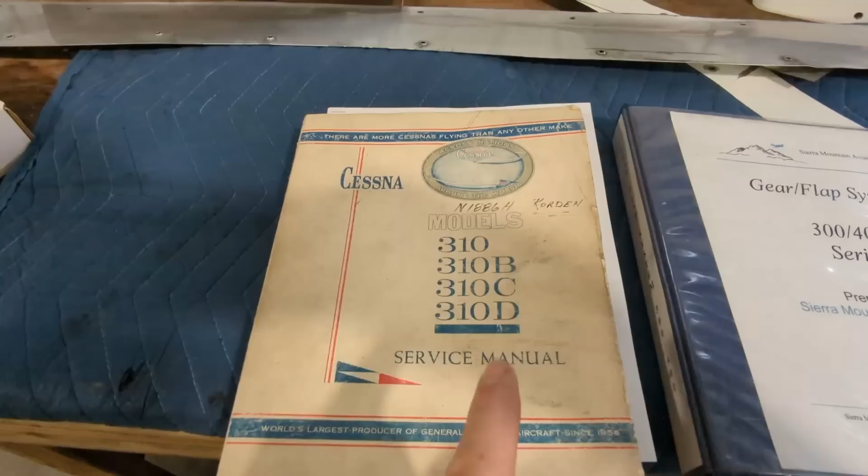Two things can kill a 310. One is beating them to death as a multi-engine trainer, and two, lack of maintenance of the landing gear. And before you know it, it's usually something like the nose gear fails, one of the landing gear fails, gear up landing, and the aircraft is basically totaled because it costs more to repair than it's worth. Stay tuned.

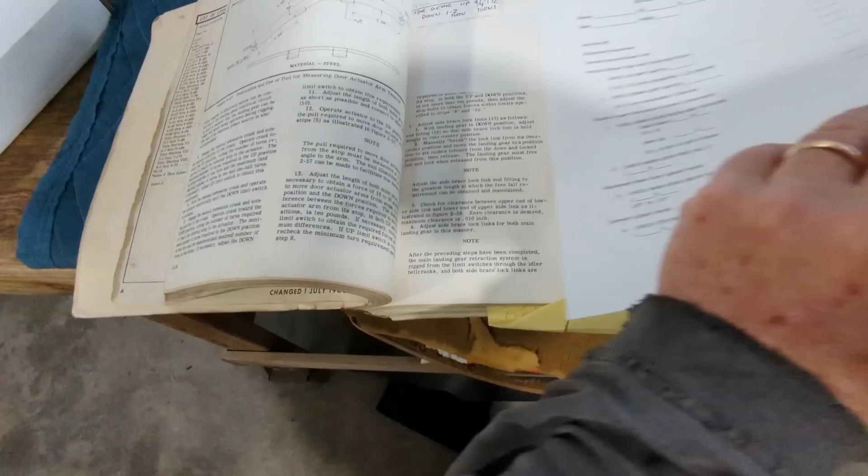Here's our source material for the gear rigging check. The service manual for the 310C and a gear flap system 300/400 series manual prepared by Sierra Mountain Aviation, Dan Grass, the AI, who's overseeing all our work. If you turn to section 2, 315, we've got rigging of the main landing gear. Step-by-step detail. I just love these old manuals. They really explain well how to properly maintain these aircraft. And then we'll also be using this checklist that Dan's developed over the years to check all the important specifications of the rigging of the gear. Then we're going to lube all the points of contact.

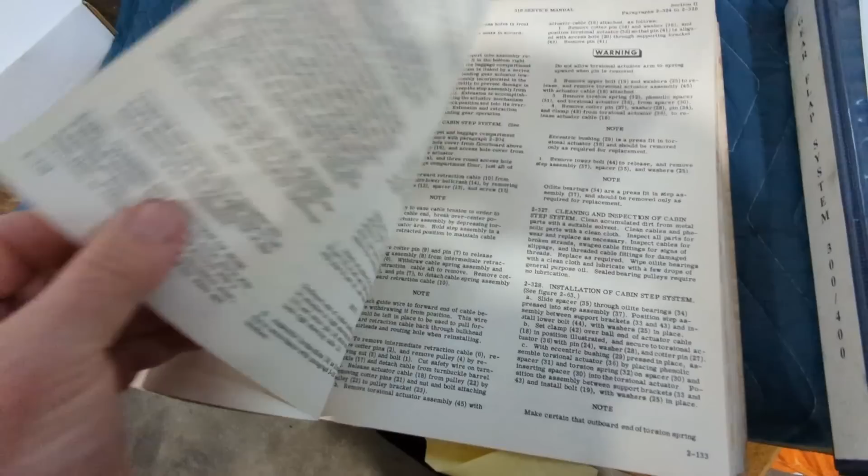Jordan's trying to explain this to me, but it's easier if she just tells us. What's the grease we want to use on the landing gear for the 310? So usually people use Aeroshell 5, but we like to use the Mobil SHC 100. You could get it on Spruce. It's a red grease. It's great. That's for the wheel bearings. Yes. Now what about for the landing gear on the Cessna 310? So the landing gear, you want to follow the maintenance manual for the aircraft, and for the 310, it's going to be the Aeroshell number 5. Okay, so I look for the grease gun with the big number 5 on it? Yep. Okay, let's go find it. There it is, Aeroshell number 5.

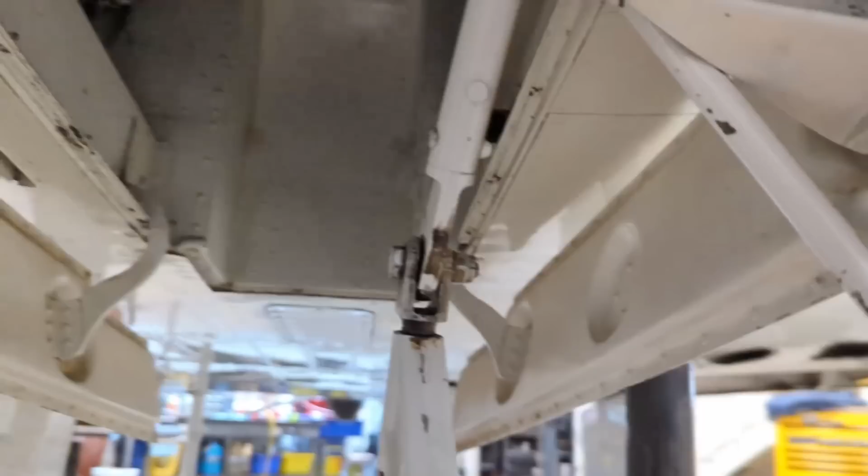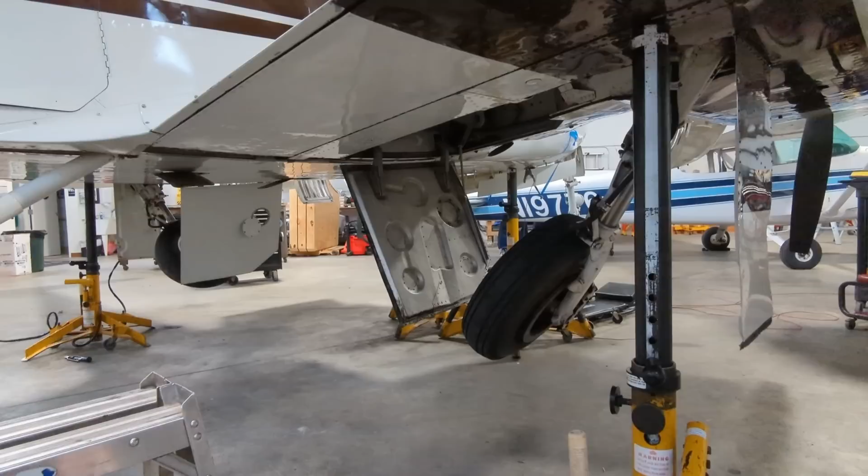So now we want to take the nose gear out of the whole system by disconnecting it right here. And so now the nose gear can just swing freely here because we got to check the main gear, right? That's what the next objective is, to get all the specs on the main gear. Correct. And take the nose gear out of the equation. Yes. Okay, stop. Okay, perfect. Turn the power off. Now we can get access to these inboard gear doors. So we want all these gear doors disconnected for this test, including the inboard ones.

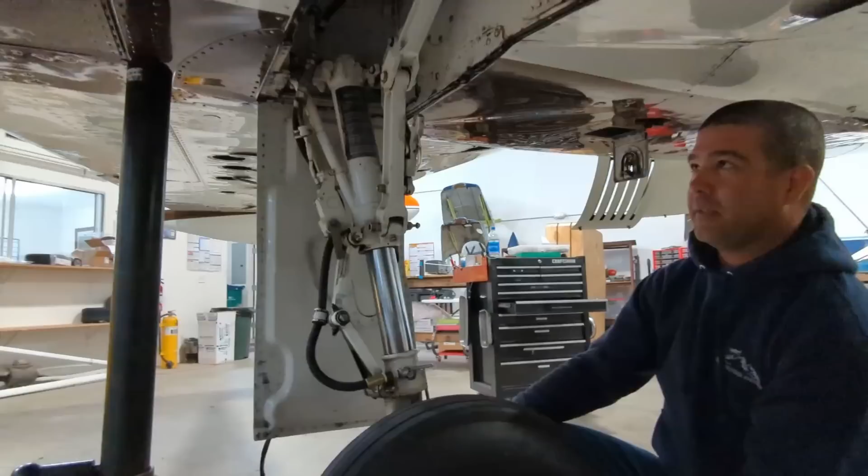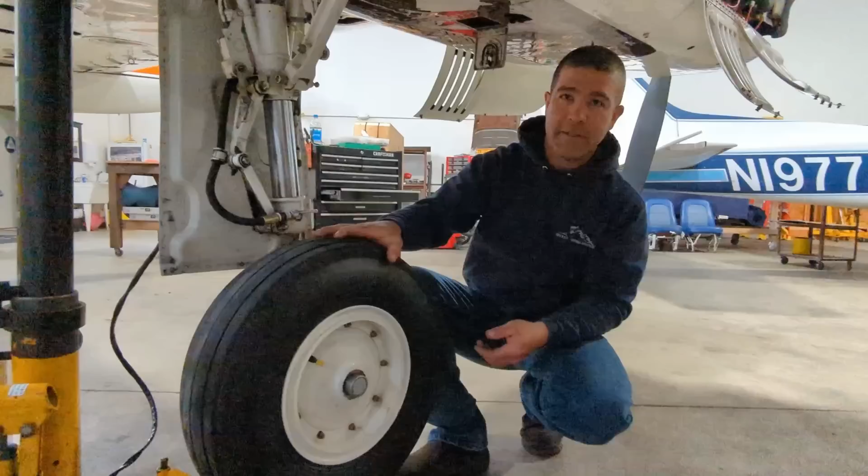Now we're going to disconnect the main gear leg right here and drop this wheel. So this is the drop test. Would this be like a gravity type of situation, or it's part of the spec of the whole rigging of the gear? So pull it out, what, 6 inches? Correct. We just want to ensure it's free. It's going to fall and lock by itself. Okay. You see how that snapped over center? Just like that. And you're good. Try a drop test on the right main gear, again by disconnecting it right up here. And it snaps right into position. So that tells you that everything is free and clear and moving correctly, and the over center is working correctly.

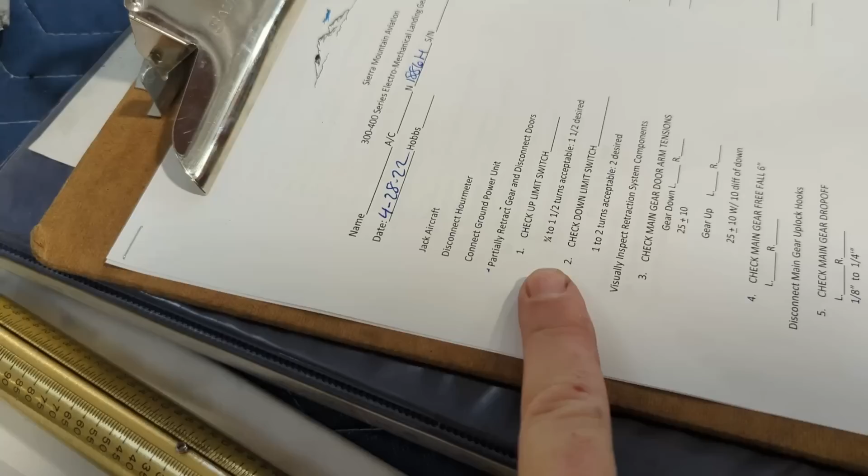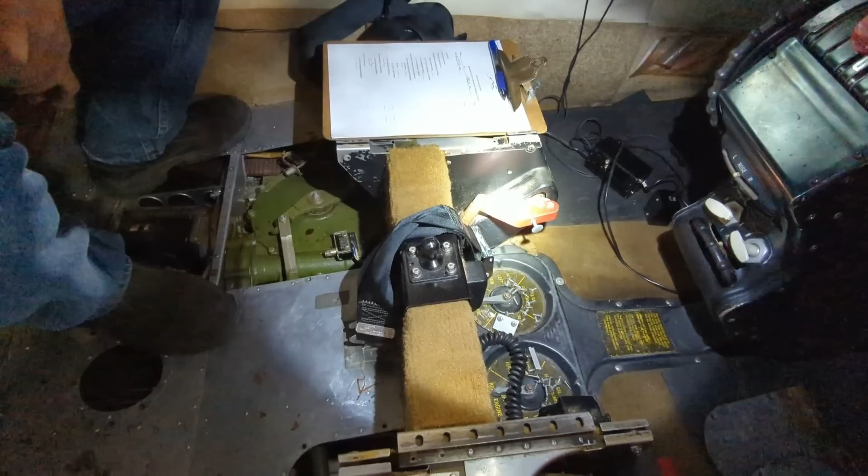We're going to add some external power here to help keep the batteries juiced up while we run the gear. Time to check the up limit switches, and what are those specs? 3/4 to 1.5 turns acceptable, 1.5 desired. Up limit switches. Okay, this next test ensures that the gear stops before it hits the internal stop inside the gear bell crank mechanism there. So right there, Dan, if you could point to that, is the up limit switch. So we want to ensure that the up limit switch is actuated before you get to the full travel of this gear bell crank system, and you want to ensure that it's 1.5 turns before the end of the mechanical portion of the gearing of the bell crank system.

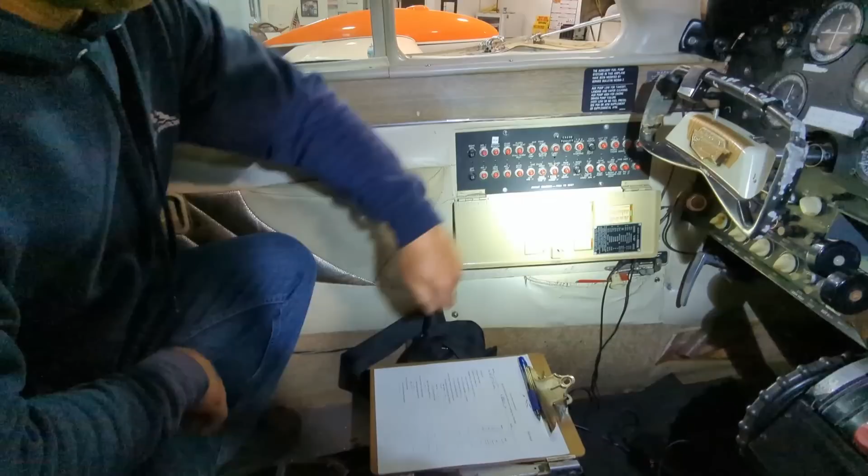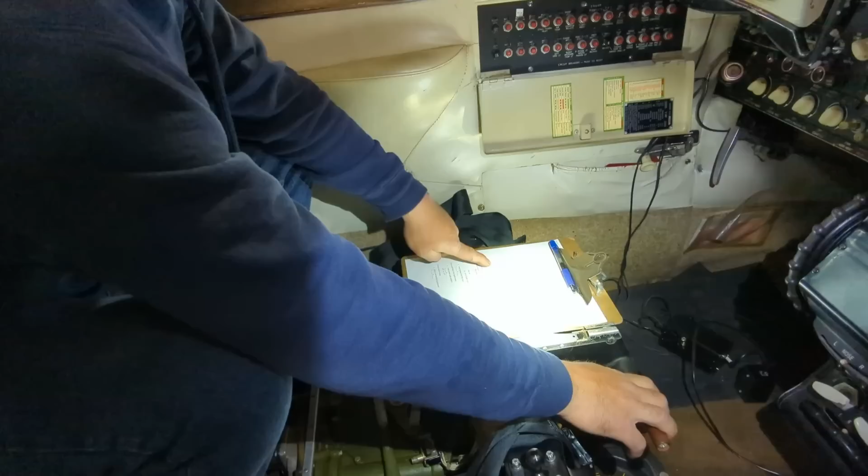Right there again, we're using the landing gear circuit breaker to actuate the system on and off. So now it's just touching the uplock switch. Now we want to check it with the manual gear extension. So you should be able to crank it up another 1.5 turns before you hit the end of the mechanical stop. That's 1. In the bell crank. And just past 1. Is that within range? Correct. We're allowed 3/4 to 1.5. So we're in range there. Good. So that prevents over jamming the gear system inside the gear bell crank. Left, right, throttle horns, and then we're going to go down and check the down.

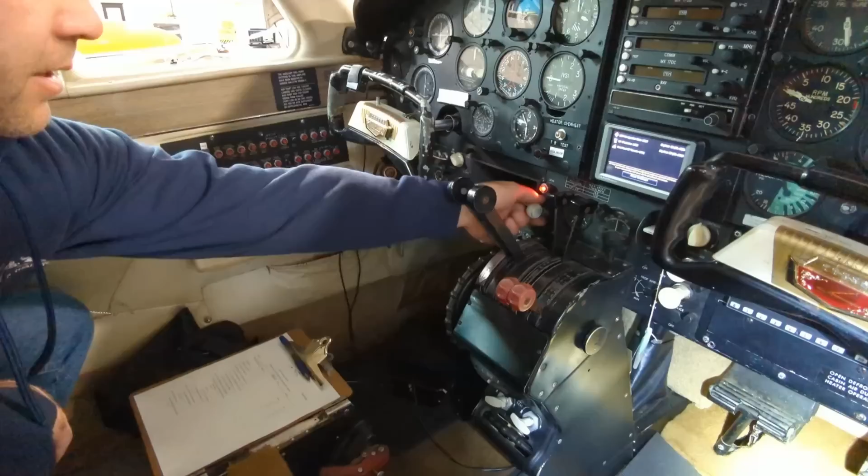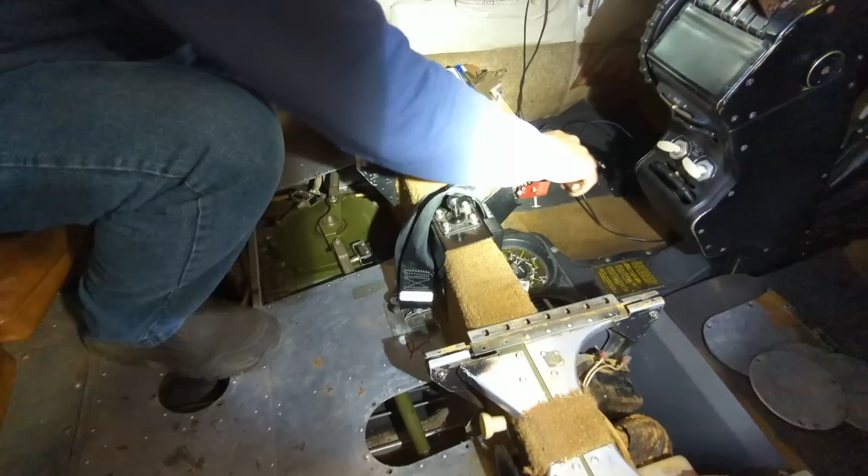Right there. Okay. And again, this emergency gear extension is just that, a gear extension. You do not use the emergency gear extension to raise the gear. If you have a problem with your landing gear, always remember a down gear is a happy gear. You don't need to emergency raise your landing gear. This is only done for rigging purposes.

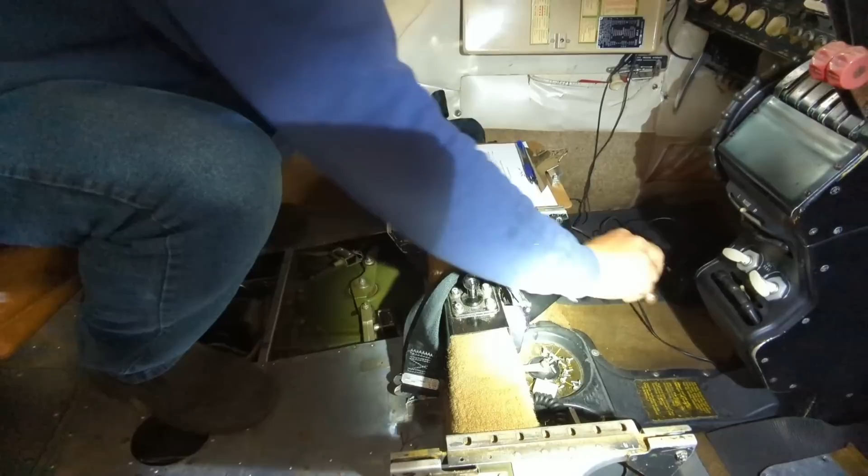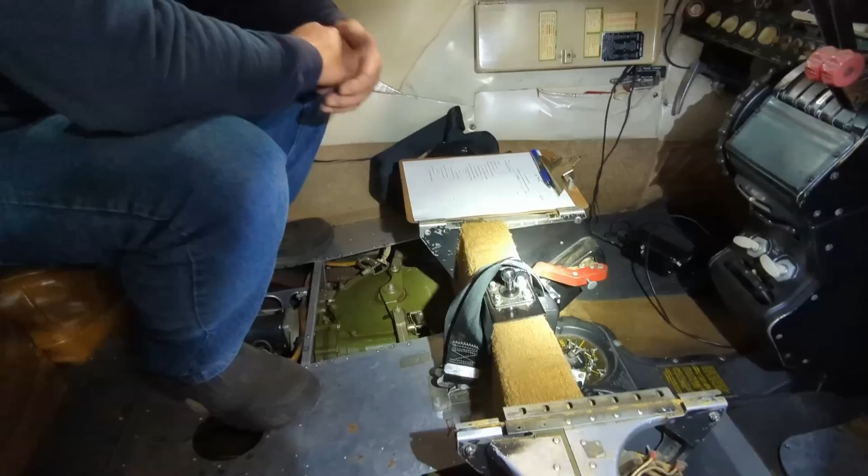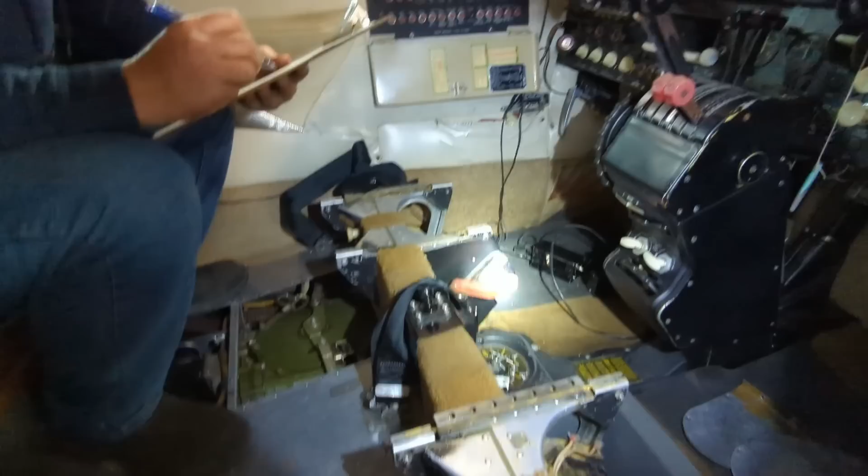Okay, now we're going to check for 2 turns on the down side. You just hear the gear down limit switch click, and now there. Dan's going to go 1 and 2. Yeah. 1 and almost 2, within specs. So when you do the emergency extension on your gear, you're going to rotate that thing until it stops. You're going to hit the mechanical limit of the gearbox, and you're going to back it up with a gear light that the gear is down and locked in the event of an emergency extension.

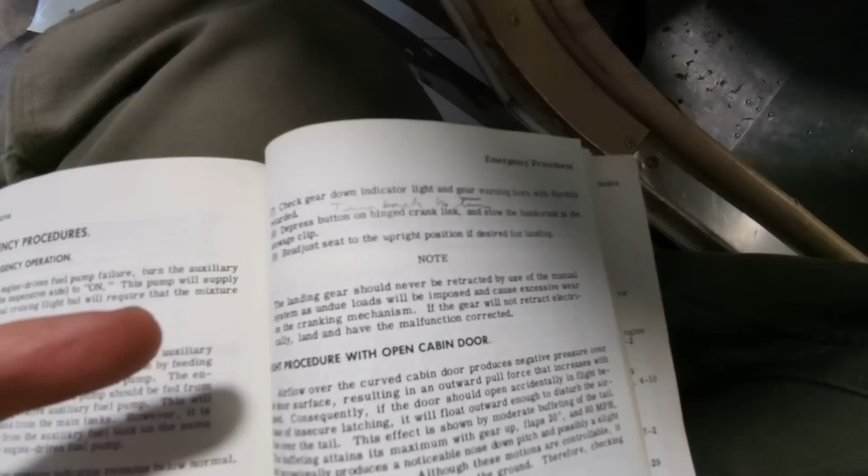In the event of an actual landing gear emergency, always consult your pilot operating handbook, and it'll step you through step by step how to deal with a manual extension on your landing gear. Remember too, on this model of 310, you have a single green gear down light. You have to have all 3 gear switches actuated before you get the 1 single gear down light indication.

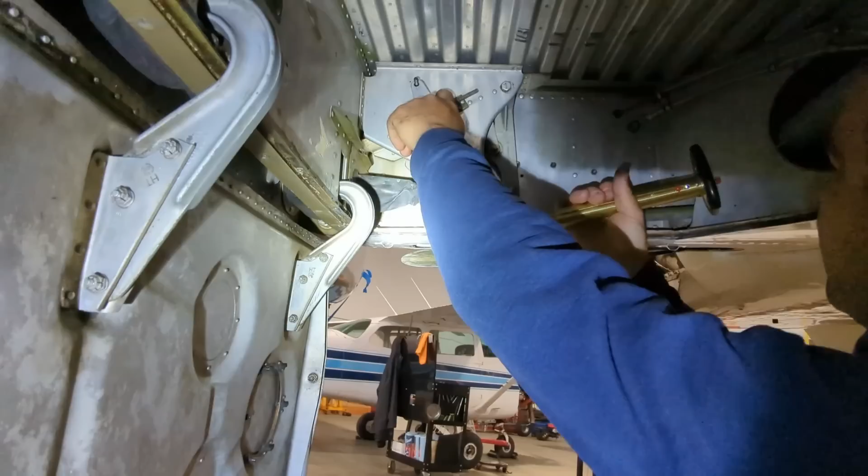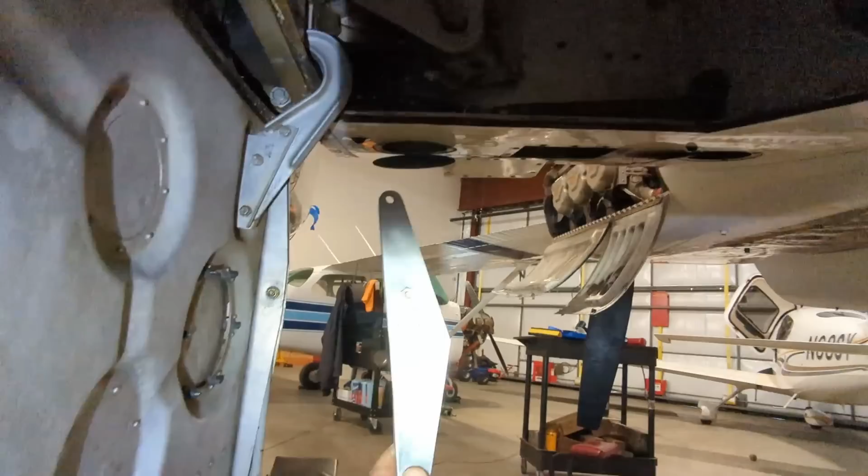Just put my finger there and we pull. We're gonna look for pounds. It's all right at 20. There, it starts moving. It moves it. And down. 20 pounds is the limit. So let's see that special tool you got there, Dan. So you need this special tool that's going to go on this arm here, and we're going to check the tension to see how much it takes. Make sure that the gearbox is not bound up. And it should take about 20 pounds of spring pressure to just move this lever off of that stop right there, which will ensure that the gearbox is operating correctly and not binding.

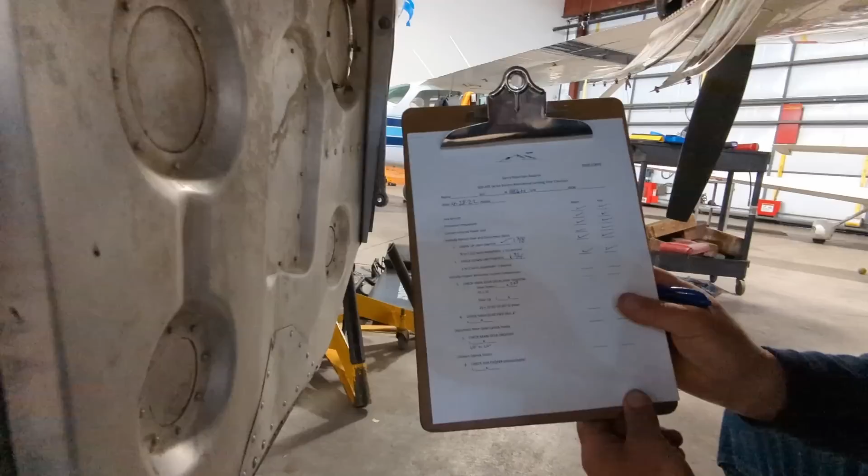So the spec for this test is 25 pounds plus or minus 10 pounds, and they have to be within 10 pounds of each other as well. So we had about 20 pounds, and so we're within spec, plus or minus 10. Now we're going to check the left main, pull 90 degrees off, pull, and 21 to 23 pounds right there.

Now, if this is out of adjustment, if it takes too much pressure or not enough pressure to move that arm, you're going to start a can of worms in the rigging department and have to fiddle with this rigging in order to get the tension back into limits. It's a matter of geometry. I mean, I suppose you could check for bound up parts or unlubricated parts, but it's the geometry of the gear that determines these tensions.

So this series of tension tests were done in the gear down position. Now we got to repeat this test in the gear up position. So now we're going to move the gear to the up position. Remember, the gear is disconnected, and that's the lever arm that actuates this door right here. You see how that worked? To open the door and then turn around and close it. So now we're in the gear up position, and we're going to recheck this tension. Very clever design.

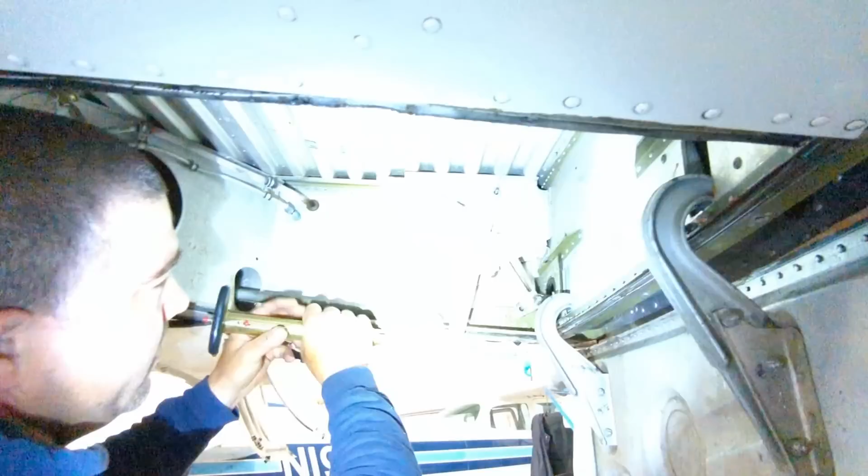We're 19. 19? Yeah. All right, 19 on the tension in the gear up position, on the left gear. Right gear in the gear up position, 25 pounds plus or minus 10. What do you got there? 25. 25. Perfect. Whew. Next, we're going to check the uplock drop-off.

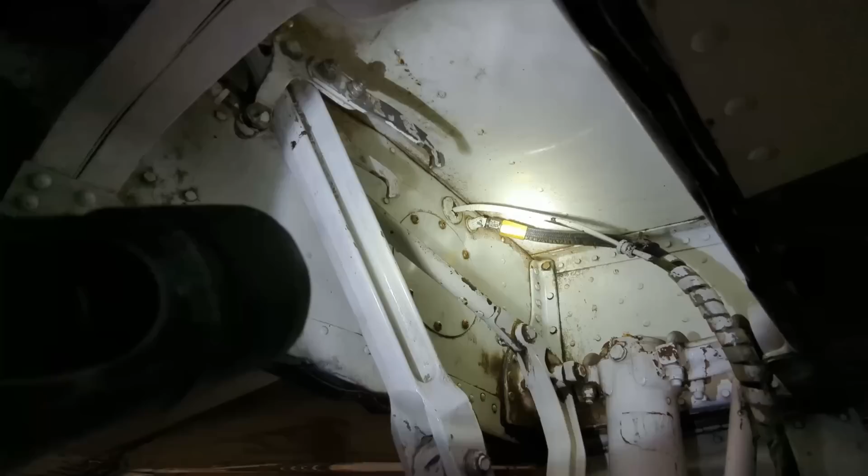These are the uplocks that the gear rests on in flight, and that grabs this pin right here, and that's what holds the gear up in flight. But we're going to disconnect these uplocks, and we're going to see just how far the gear sags on its own without being held up by the uplocks, so that the rigging on that is correct, so that you're not putting an excessive load on the gear uplocks.

Now this next bit I want to dedicate to my friend Jimmy Webb there of Save the 310, Jimmy's World. If you start from scratch on one of these 310s rigging this landing gear, it is at least a 3-day job, and it is a hell of a geometric puzzle to try to figure out all the rigging on this gear to meet all these specifications. And I'm not even sure where you would start on that rigging process other than in pieces.

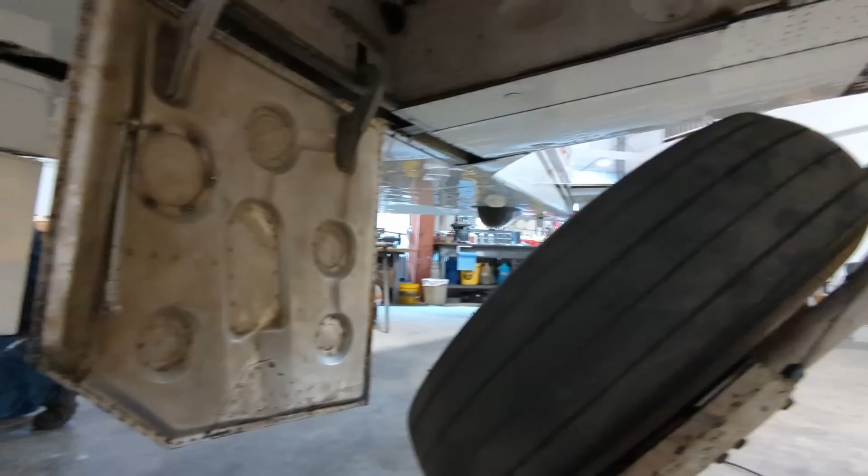Now before we do the gear uplock test, we got to reconnect the main landing gear. Note of caution, you always want to operate this gearbox symmetrically. You never want to operate the gearbox with the load of one gear on it and the other gear off of it. You'll break it. So we reconnect the gear right back here.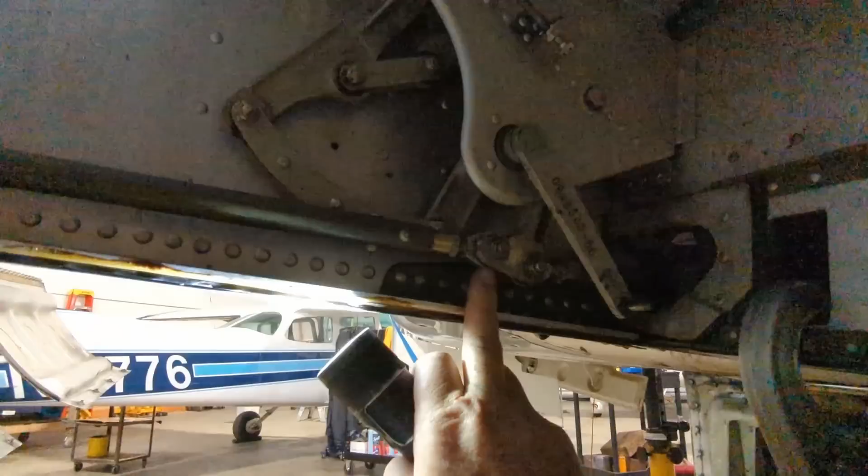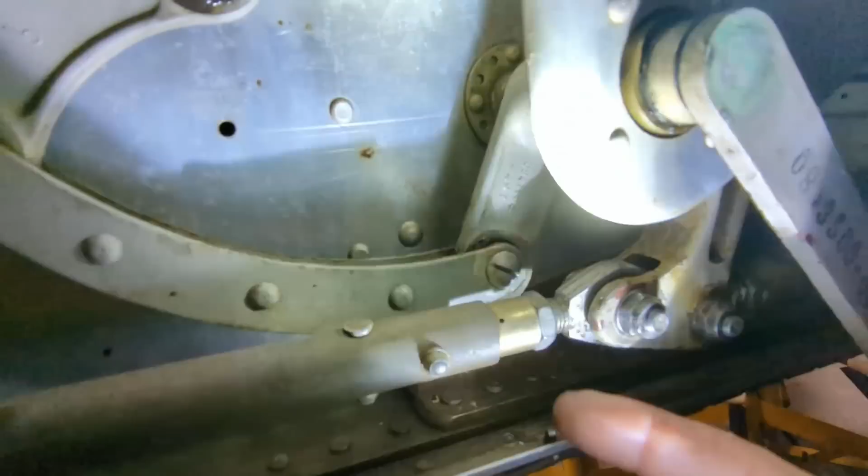And you've got to have this gear in this one sweet spot to get this bolt in and out of here to clear that bell crank. Now this is perhaps the most delicate part of the operation. These uplocks, we need to move them just that much. I mean, there's the mark of the original alignment.

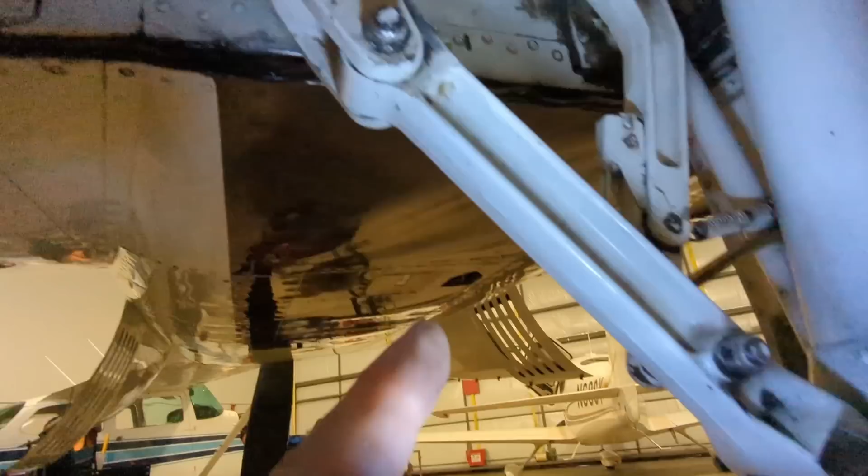Loosen these two bolts up. They've just got a little flush Phillips on the backside. Move this uplock down just that much so that it will miss the pin altogether, and we can see how far the gear drops in the full up position without the assistance of the gear uplocks.

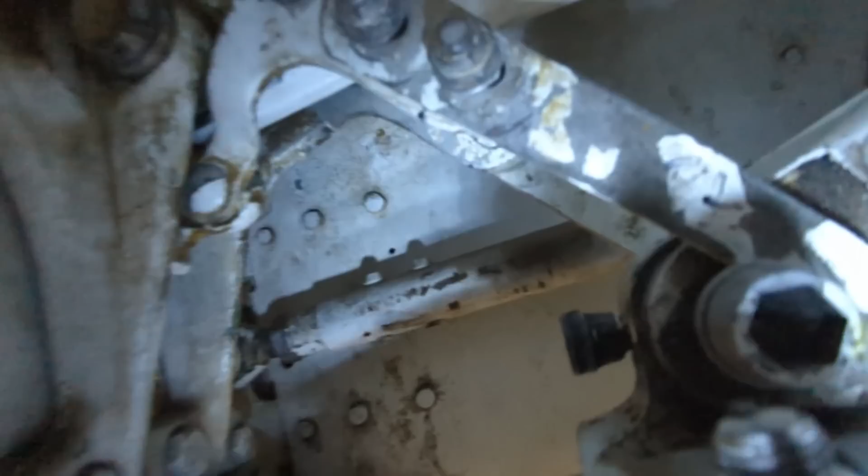It's very easy to bend these aluminum uplock arms during this operation. And then of course we'll need to put this back into the correct position for the uplocks to work correctly once we're done with the test. So now with the gear in the up position, we're looking way up here at the uplocks right there. You see how they're clear of the pin? So the gear is just being held up under its own right now without the assistance of the uplocks.

So how many times have you heard of a gear emergency where the guy can't get the gear down because he can't get the gear released from the uplocks? This is why it's critical that the uplocks be properly adjusted, especially on a mechanical landing gear system like the 310. Hydraulic landing gear systems are considerably easier to work with than mechanical systems. On a mechanical system, everything's got to be adjusted just right.

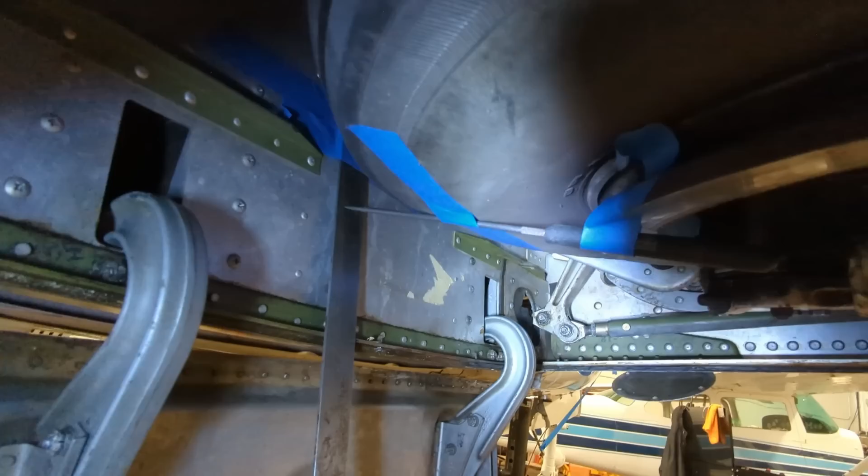So the spec for this next test is only 1/8 to 1/4 of an inch of main gear drop off without the assistance of the uplocks. So we've taped a ruler up in the wheel well, just some sort of a reference to see how far this thing's going to drop off once we cycle the gear. We've got our indicator taped firmly into position for the measurement.

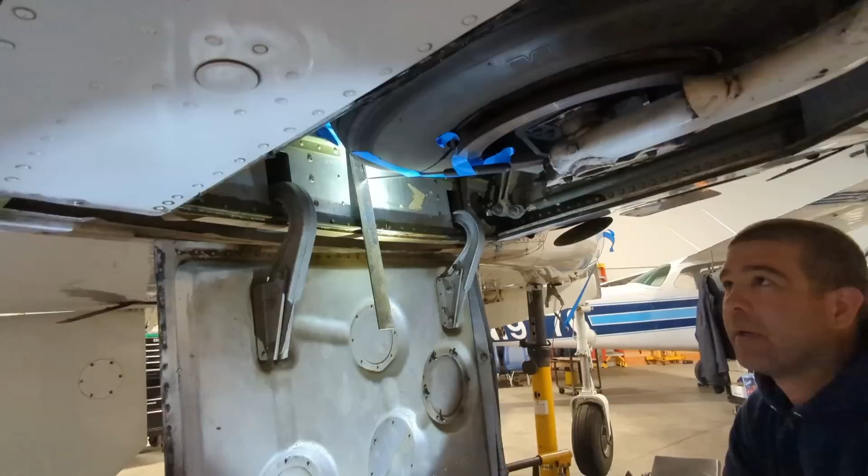All right, so put the handle in that position. Stow the handle, and then put the gear handle in that position. Emergency handle is stowed, circuit breaker is still pulled, gear handle is now in the up position. Okay. All right, so we're gonna watch where it stops. Roughly, when it was all the way up before, it was right on the 6 mark. And then when we went down, it raised up and went down. So we're gonna mentally note where it stops up here and then drops, from the high point to where it rests. Correct.

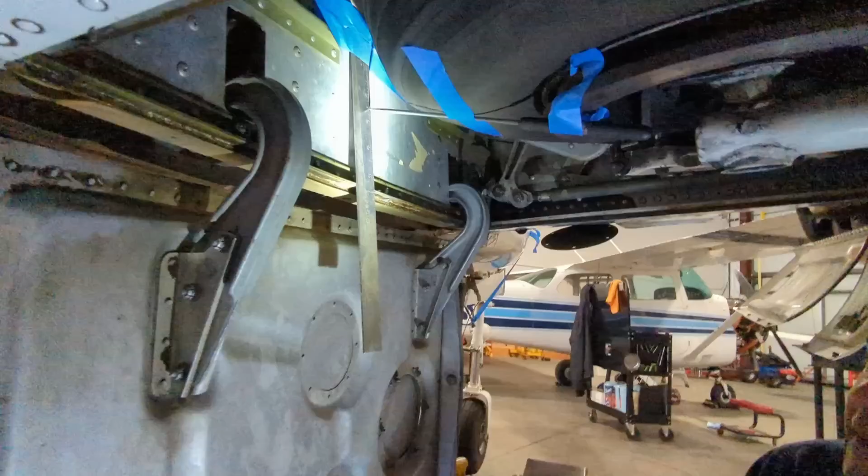So Jordan, you're ready to go up. Go ahead and push the circuit breaker in, and just let it run. All right. So gear handle stowed, emergency handle, gear handle up. I'm pushing the circuit breaker in. Correct. Okay, here we go. Oh yeah. What did I see there? 1/4 of an inch or 1/8 of an inch? So we were just over 1/8 of an inch. Perfect. 1/8 to 1/4.

Now, if any of these rigging adjustments are out of spec, go to the book and it'll tell you exactly what you need to adjust to bring it back into spec. But remember, whatever you do on one side of this mechanical gear affects the other side of the mechanical gear, so you have to find that happy medium that keeps both sides in spec.

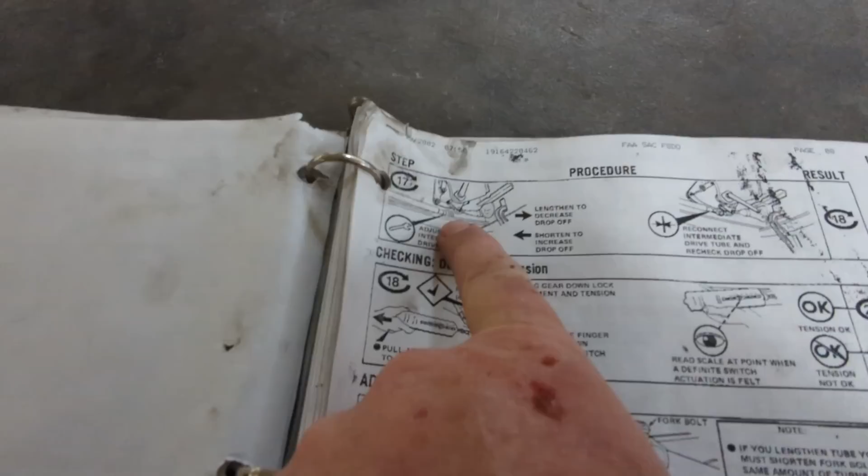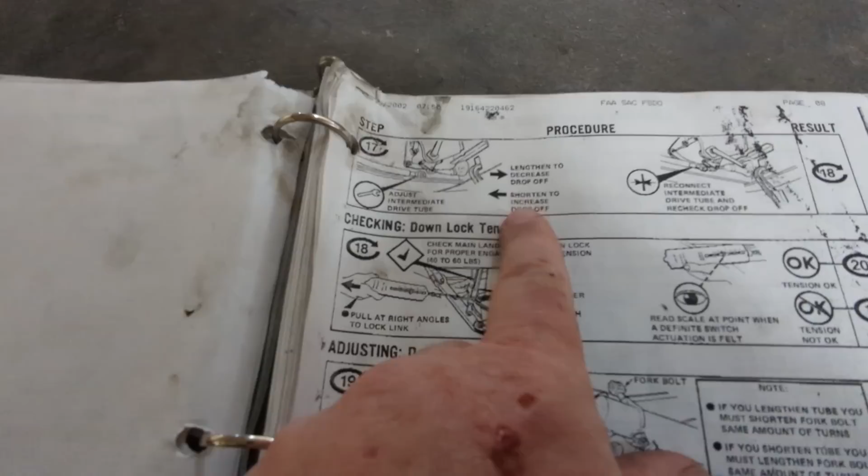So it says here, drop off not okay, go to step 17. Step 17, disconnect the gear again right here, and we shorten this arm length to increase the drop-off. And we do everything in just 1/2 of a turn increments, because a little bit goes a long way on the geometry of this mechanical system.

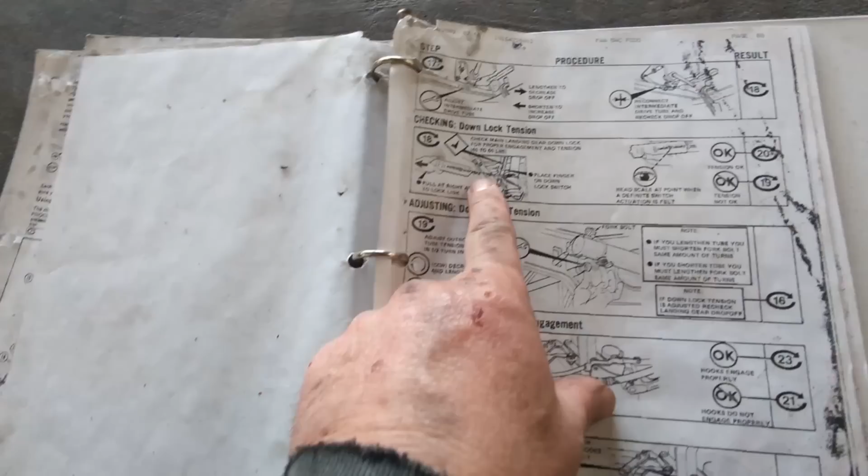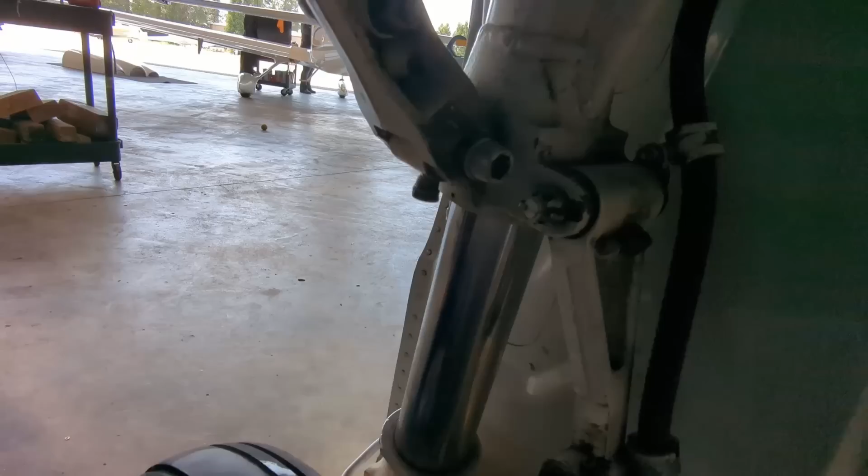Now we're checking the downlock tension, 40 to 60 pounds. And let's go. Hold it. 57.5. Okay.

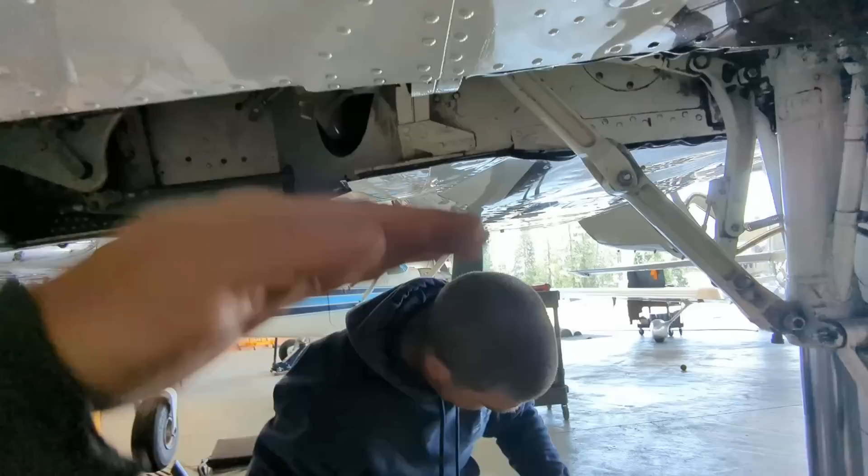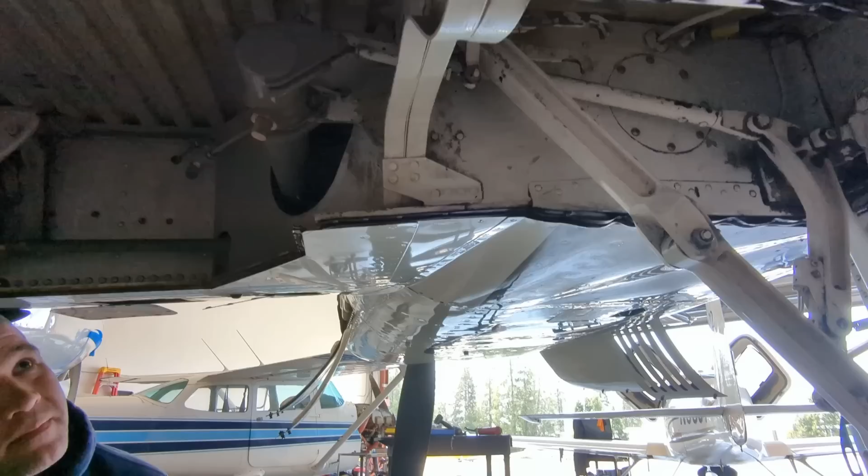Okay, we've checked the uplock hook engagement, and now just tightening all that up, so that the main gear doesn't float around up here too much. We tested the drop, but now we want it to hook with the uplock hook so that it doesn't bang around up here in the wheel well, and also such that it releases when you put the gear down.

This would be the gear down indication switch on the right main. Remember, it takes all 3 of these switches to properly indicate the gear down single green light indication in this model of 310. So remember, this inboard gear door is normally closed with the gear down for takeoff performance.

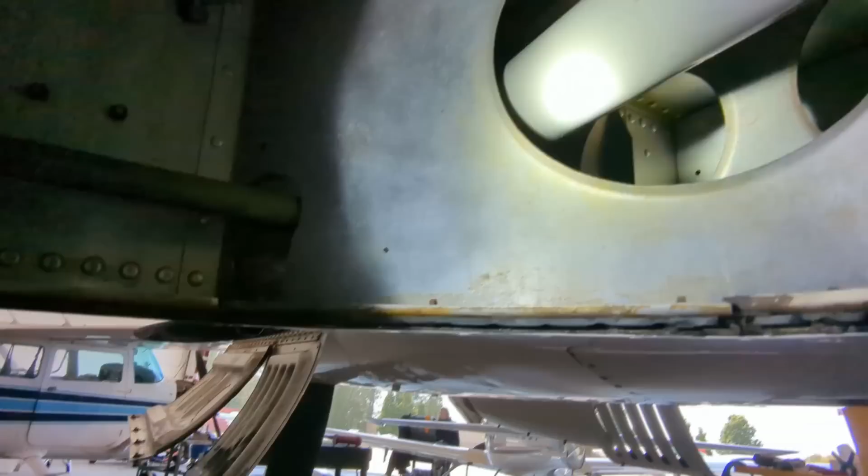So when you go to raise the gear, the first thing that happens is the bell crank pulls this rod in, sucks it in. It moves this arm, which in turn opens this gear door rather quickly, and then continues to pull this arm, which rotates this tube, which then unlocks these uplocks right here.

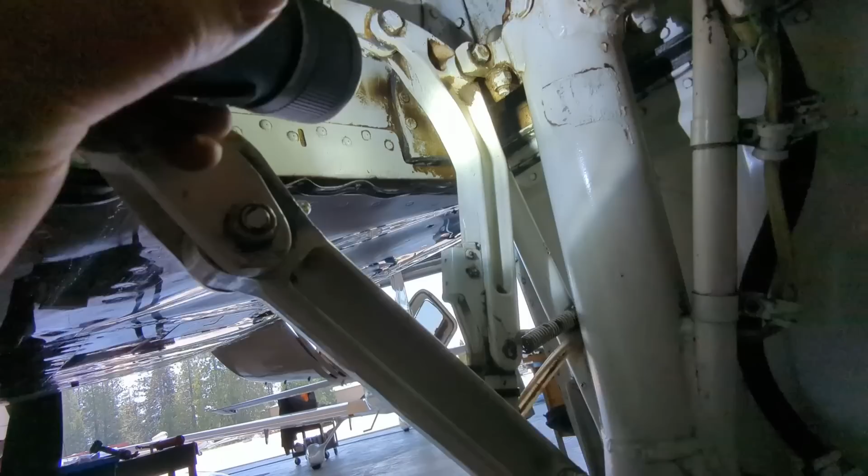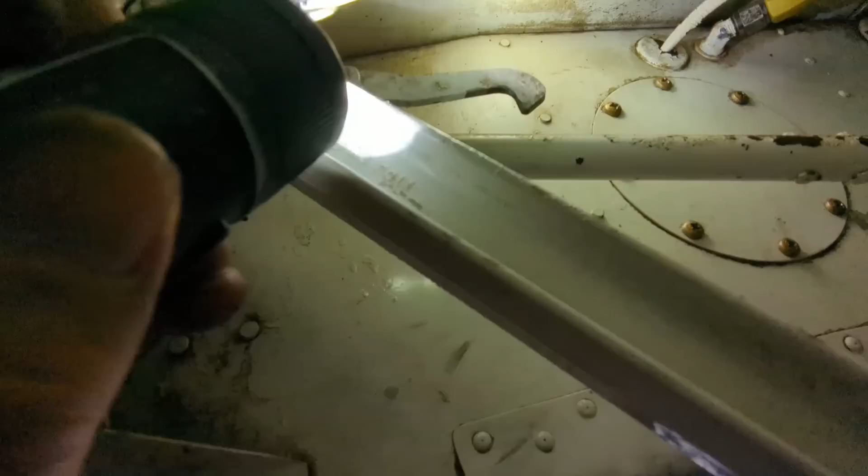And then this push rod here, as this tube continues to rotate, pushes over center the over-center lock, and pushes the gear up into the wheel well. And then these uplocks swing down and lock the gear in the up position, and this arm swings back and forth and recloses this door behind the landing gear.

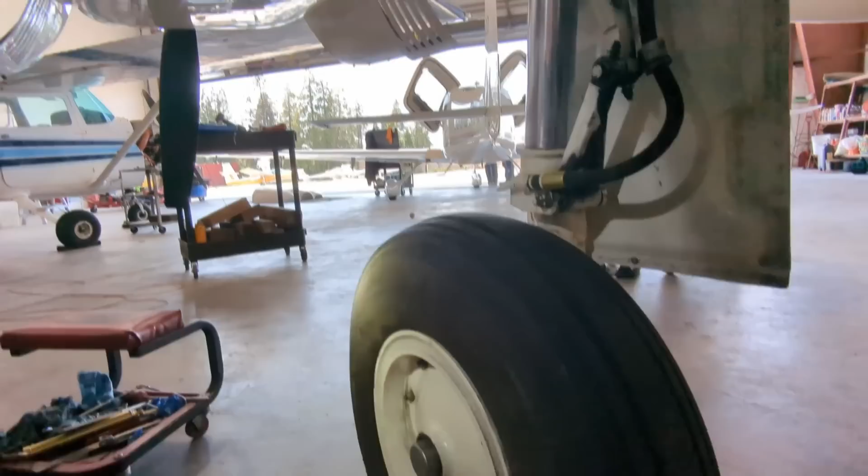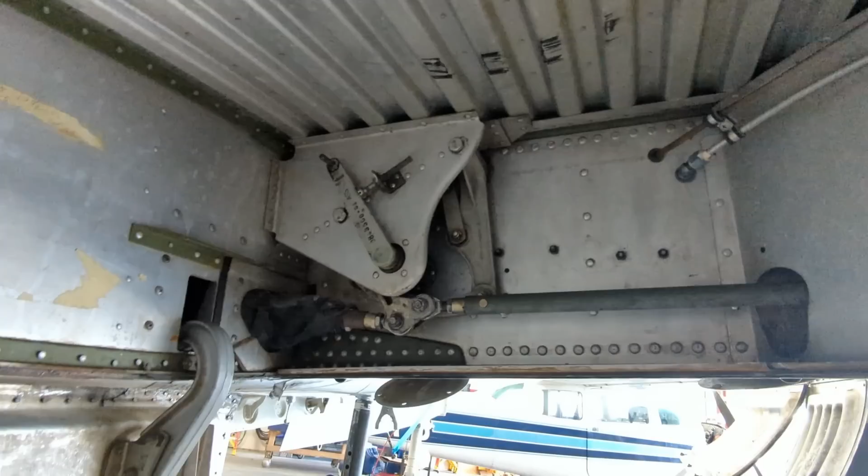And as you know, for single engine performance, it's critical that you get the gear up and reduce all this drag on the Cessna 310, on any light twin. And just the opposite occurs when you go to extend the gear. This push rod starts moving out. This arm does a quick wig wag, opening up this door. The push rod continues to come out, rotates this torque tube, and the first thing that happens here is it unlocks the uplocks, and then the gear begins to extend by pulling this rod forward and pulling the gear down.

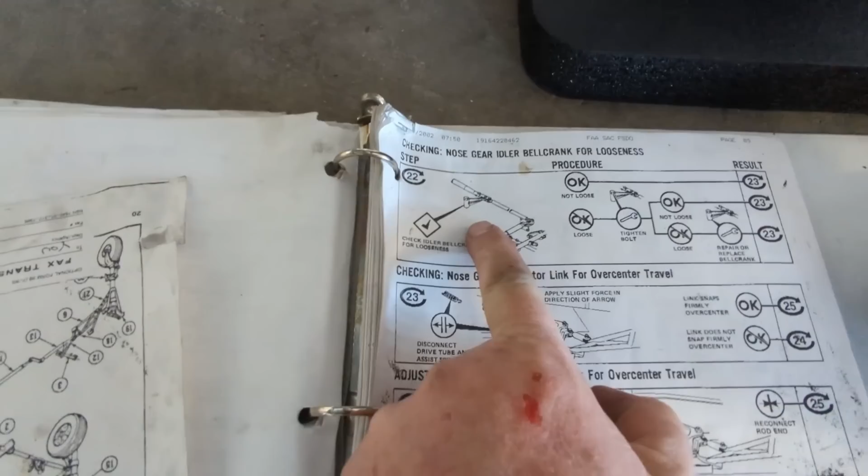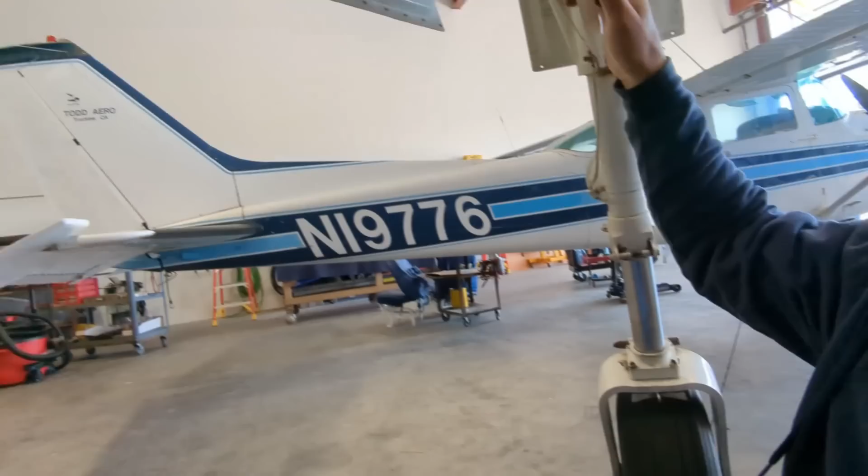Okay, onto the nose gear now. Step 22, we found this idler bell crank right here and checked it for play. It's up under the floorboards there. And now onto the rest of the nose gear. Now we're gonna check the over centering of the nose gear. So show us how that works, Dan. And you're just pushing on the nose gear to get that over center. We don't really do a drop test on the nose gear because on this model of 310, the nose gear is kind of slanted forward. So you got to just push it a little bit, which is what the mechanism does.

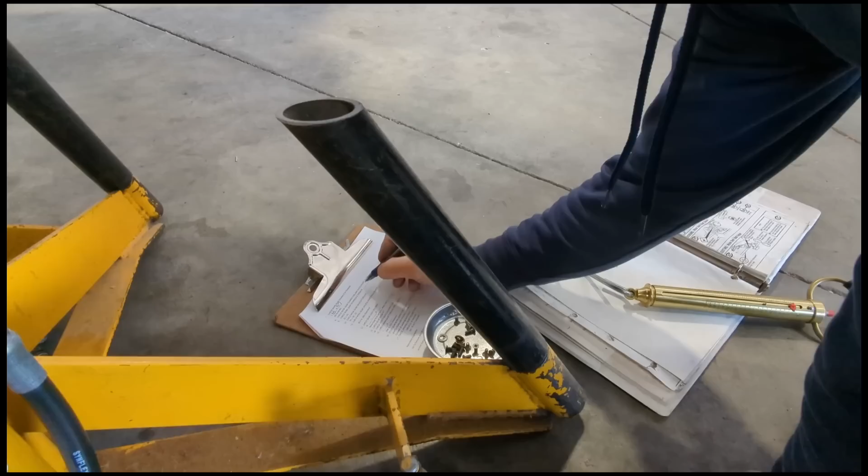Go. There. That's 20? 20, okay. And then what does the book say? It says we're going to be 25 plus or minus 10. So we are in the ballpark. Clear. You keeping up with all this? Up with a red light.

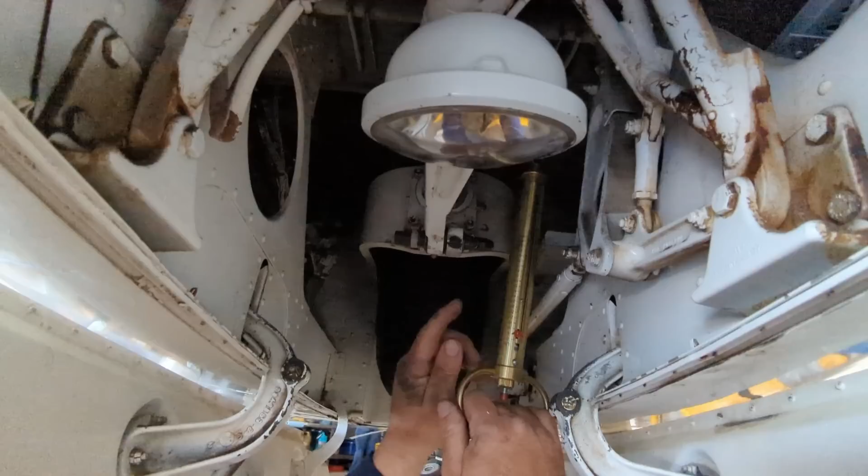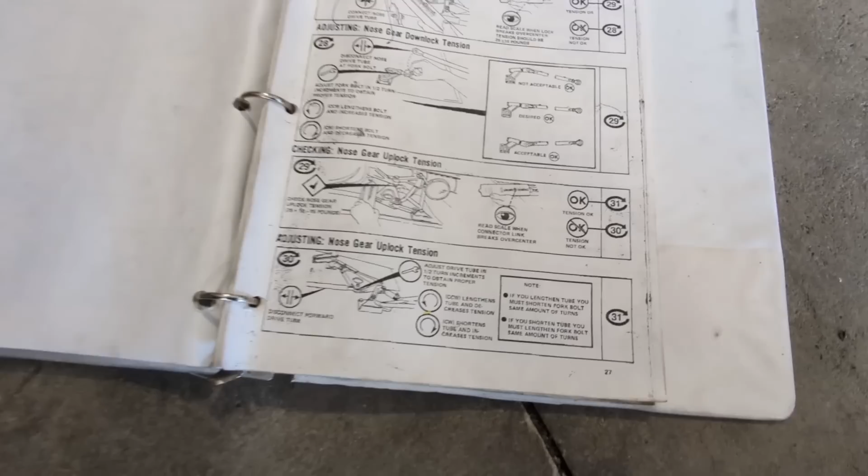Now let's check the uplock tension on the nose gear. Alright, so you ready? You can read this side. Want to read which side? Pound side. Okay, I got my glasses. Do you want me to watch where it breaks off? Yeah, you call the break. Okay. Oh, right. There. 65. Okay, and the book says 75 plus 10 minus 15. So we are good. All right.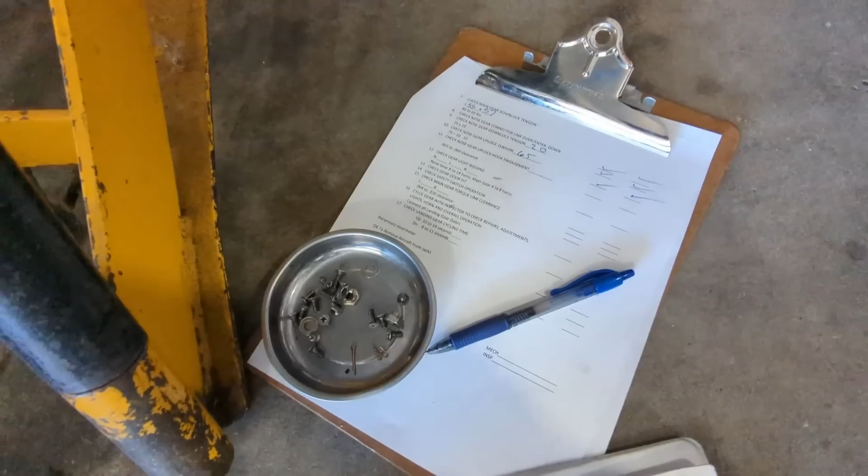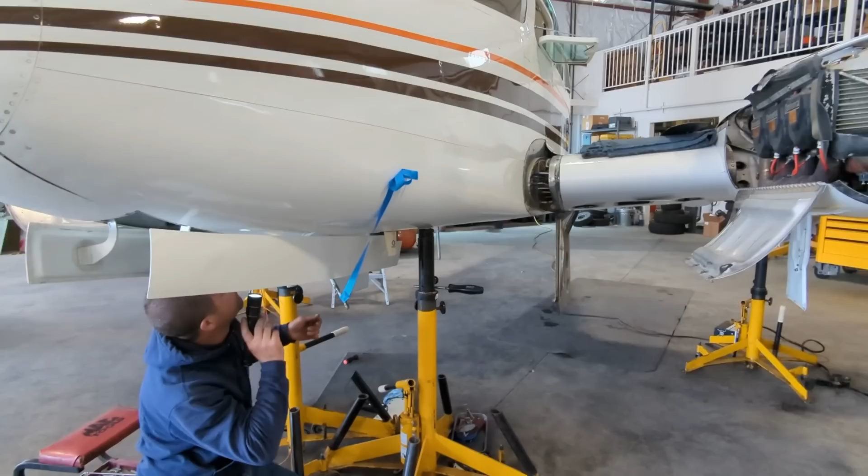Get to the bottom of this thing yet? Oh, no. Good grief. We've been here all day. No wonder these things are so dang expensive. Usually gear is about a day. A day just on the gear. Plan on at least a full day, 2 guys rigging the gear. 2 guys or a guy and a girl.

Step 31, uplock engagement. So you get up there with a flashlight and a mirror and you just look for daylight through the uplock engagement versus the pin, because it's got a spec there, 0.003 to 0.060 inches.

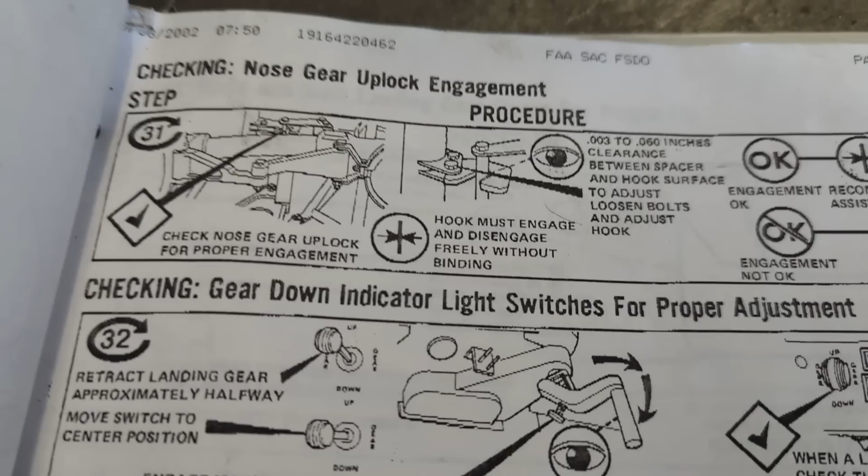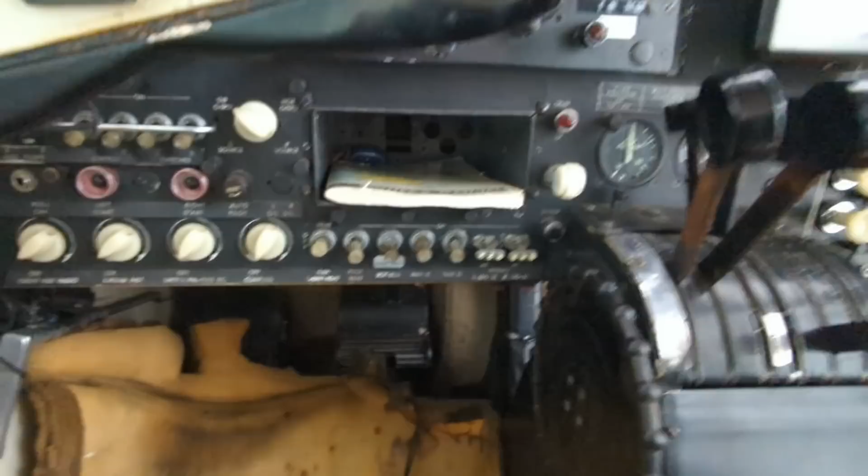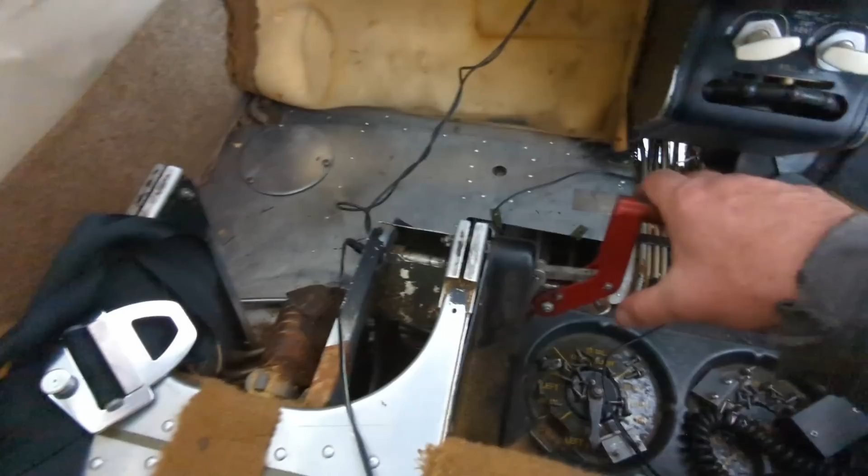Okay, so with the gear handle in the neutral position here and the circuit breaker out, we're going to continue to extend the gear manually. There goes the uplocks. There goes some lunch. And what I'm looking for is at what point does the green light come on. The interesting thing here is that the green light should come on without the circuit breaker in. Well, it just comes down real easy. It's almost like gravity. If I let go of it, it'll almost start spinning on you. So you got quite a ways to go there, quite a few turns. I'm watching for the green light here.

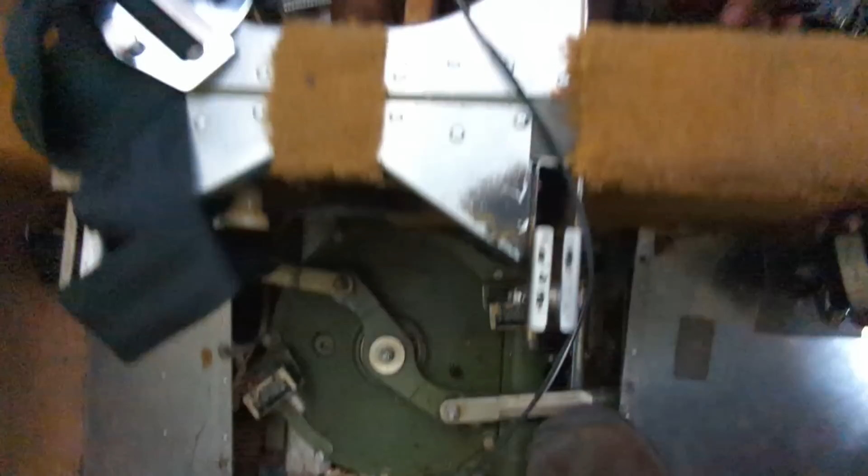Okay, I just got the green light. Look at that, there's still ways to go. 1, 2, 3, 4, 5, 6. I call it 6.5 turns. Yep. So that's some real important system knowledge, to know that you can get the lights without the motor circuit breaker engaged. Just the opposite of the old Bonanza.

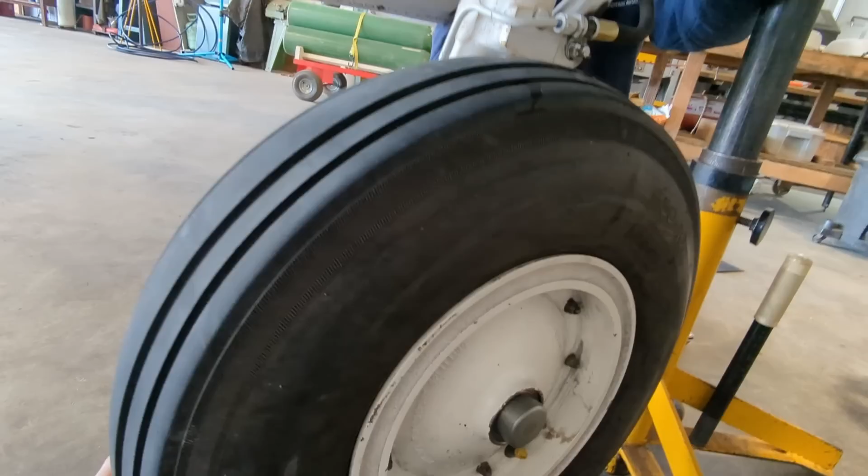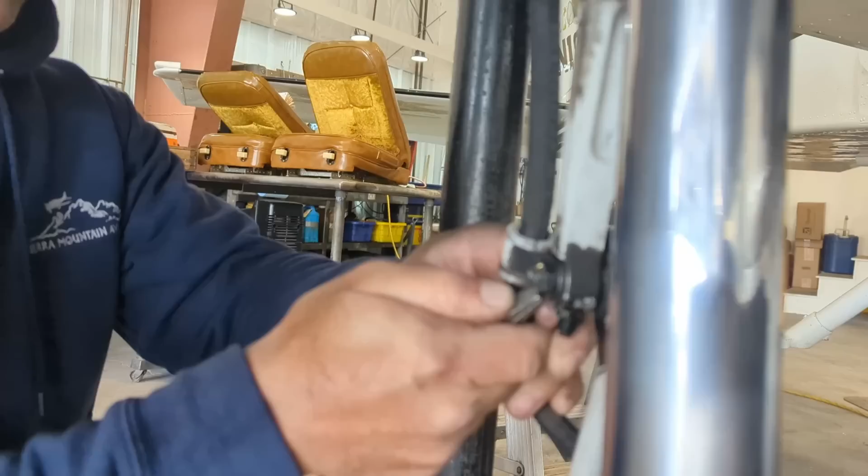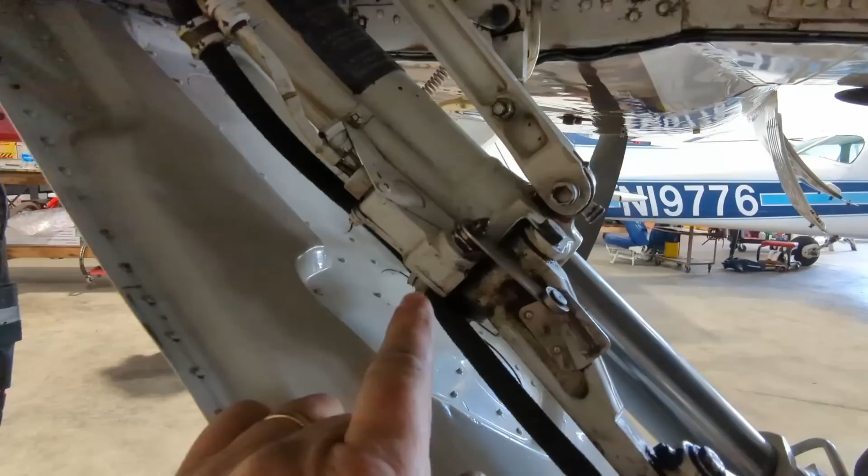And then finally, one of the last things to check is the torque links here. What were those specs? They are pretty tight. Out to 0.002. If you twist this tire, these torque links can only move so many thousandths. And we'll get that tightened up as they loosen up over the years to minimize that. So just one hole tighter on the castellated nut. Tight tolerances on the Cessna 310. Everything that doesn't have a Zerk fitting but moves, you can give it a blast with this. This is the squat switch here on the left main gear, which prevents you from raising the gear on the ground, and we tested that as well. Okay, we got all that done.

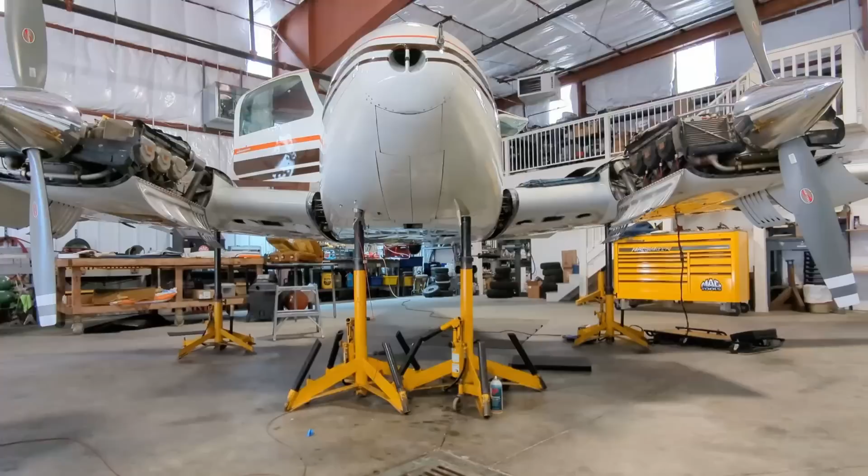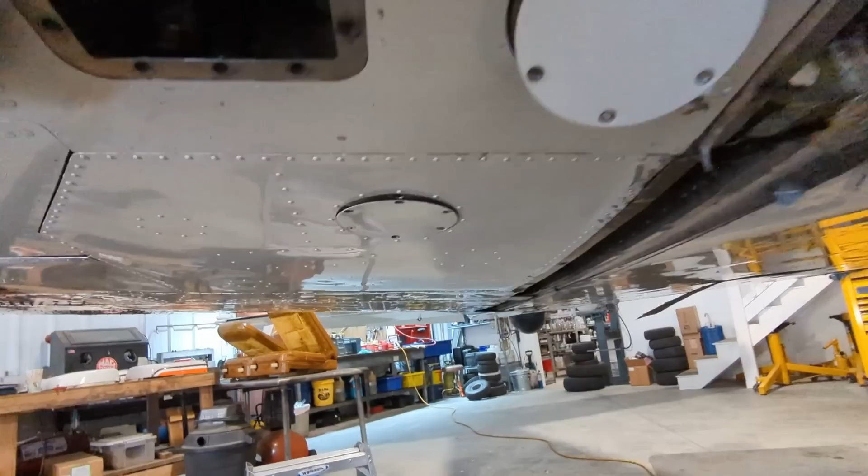Now we're going to run the gear up and down with the doors connected, and we also got to time the gear up and down. There's time limit specifications as needed for single engine emergency type operations, and it was about 10 to 14 seconds for the gear to retract, and there's a time limit for the gear extension as well. Yeah. Okay, I'm going down. Green light down. Okay, and then go all the way up one more time. Okay, I'm going up. Okay, hold on a second. Holding on a second. Oh yeah, look at that. Nice.